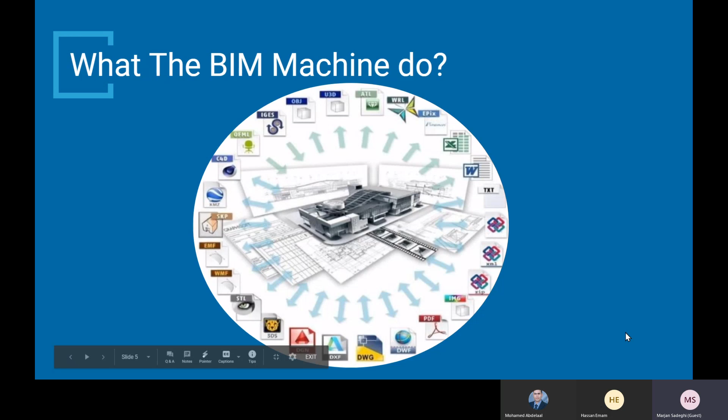So how does it work? We have worked on producing a backend using Python and Flask framework that provides a RESTful API. IFC OpenShell was used to handle IFC files and parse them into a MySQL database. The front end uses libraries like Three.js for reading converted IFC files and displaying these on screen, and d3.js library was utilized to integrate with cross-filtering functions of the Power BI application. We have also used Power BI framework PBIViz, which uses TypeScript.

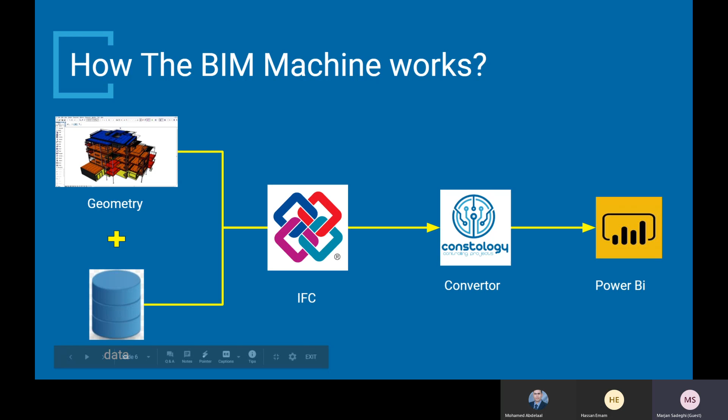So we basically are taking geometry and data from the model and convert that to an IFC format. And then Constology is actually the converter, and then we integrate the data within Power BI.

So the functionalities include 3D visualization, 4D scheduling, and 5D cost management. It ranges from merely visualization and run walkthroughs and renderings to construction sequencing simulations and then value engineering on the 5D side.

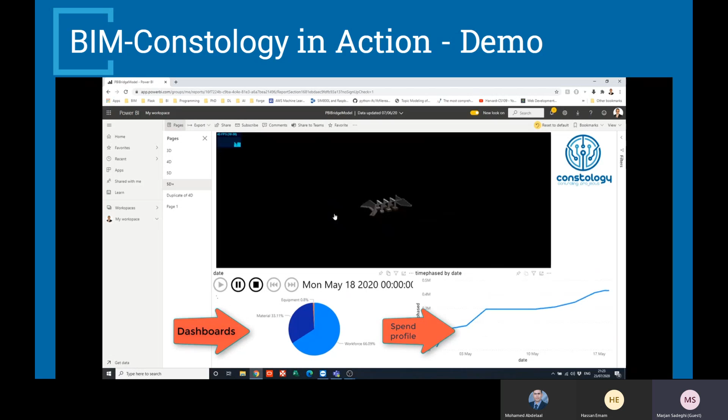So we'll go over the benefits. The first thing and what is very important is that the platform is very easy to use. So professionals with different levels of skills working with technology can definitely use the platform still.

The BIM machine handles a large amount of data and big models and parses those IFC files to the database. With the BIM machine, users can easily convert the geometry into a readable format by WebGL libraries while maintaining reference to IFC GUID objects. The overall integration works seamlessly and it is smooth in the ways models are handled.

Next is the future development opportunities. The first thing is performance improvements to enhance response time on large models processing. Next is the potential opportunity to investigate integration of VR/AR with business intelligence and BIM. Next is the potential implementation on mobile apps, integration with native models from major software and applications. And last is AI and ML models.